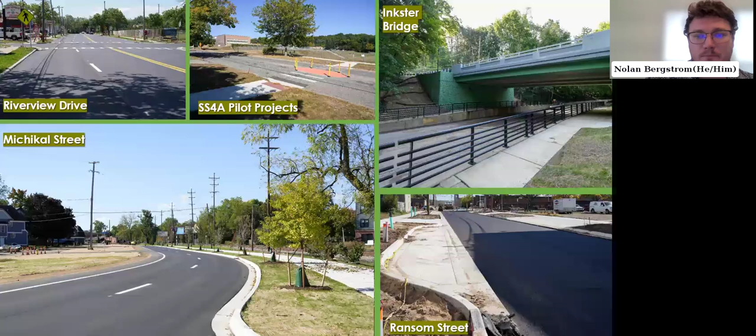And then, of course, Westnedge Avenue, which has been kind of the big one this year alongside White's Road, just kind of giving the scope of how much infrastructure was changed on those roads.

When we're talking about water main replacement, it's a really long process, but the benefit is that we hopefully won't have to dig those roads back up again in the near future at all. So this has really been a huge step forward in terms of the history of deferred maintenance with these types of projects, and just really needing to upgrade our underground utilities. It's a long process, takes a lot of time and energy and resources, but it's a net positive.

And then we've also installed some traffic calming tools as well as adding some non-motorized facilities in the city. Lovell Street's a good example. That's wrapped up in our Safe Streets for All program, but it's also called out in the Vine neighborhood plan, and there was some good support from residents along Lovell Street, especially on the west end, as you get closer to Oakland Drive and Stadium.

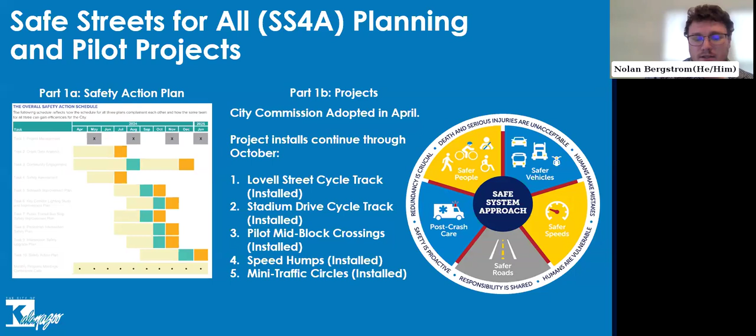And to help us get this safety action plan, I'm going to hand it off to our lovely consultants from AECOM and Alta, to introduce themselves and walk us through what that safety action plan is going to look like.

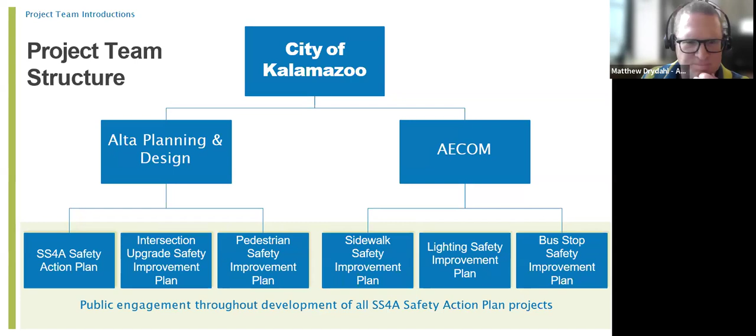So on the next slide, why a safety action plan? Nolan talked about it a bit. Safety has been a top priority at the federal level for a number of years now, and a significant amount of funding has been earmarked to address safety. An action plan like the one we're pursuing here is often required to obtain infrastructure grants, and that's really important. But this process will also help the city of Kalamazoo tackle safety issues in a comprehensive and strategic way.

On the next slide are some Michigan statistics. The point here is, so many crashes, right - 287,953 reported crashes, this is I believe in 2023. 1,021 were fatal. Bicyclist death toll was 24, pedestrian 183. So a lot of crashes that we want to prevent.

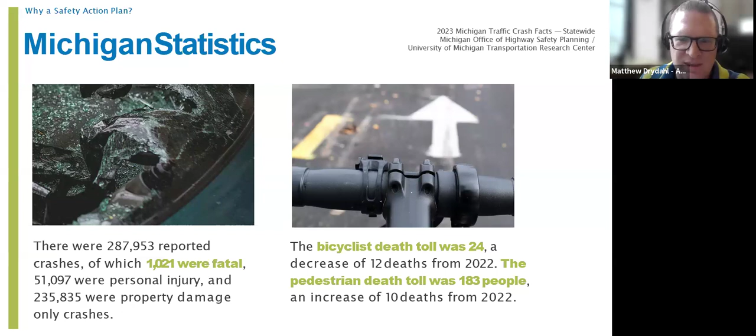Moving into Kalamazoo statistics, we'll just highlight here: 23 people killed, 3 of them walking. The idea with these Safe Streets for All efforts is that 0 deaths are acceptable on our streets, and we want to work to prevent them in the future.

So on the next slide, why is this happening? That's partly what we're going to figure out. This process will include significant analysis of crash data and others - that's essentially what we're here to figure out. But we generally know that speed is a major factor in crashes, especially crashes that lead to serious injuries. We also know that we often overbuild streets, across the country, in order to move cars efficiently. Again, that's what we're exploring here, and finding ways to address it.

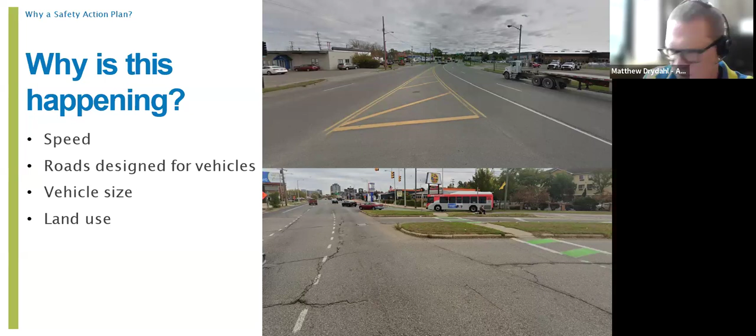So now we'll move into the project overview. On this slide here, we'll take a moment to give a brief overview of each of the 5 components to give you a sense of what we'll be exploring in the overall safety action plan.

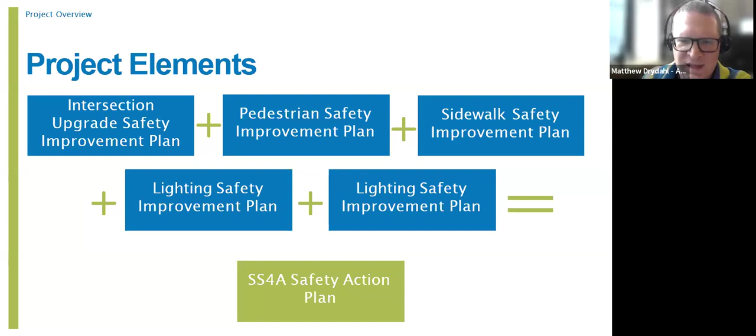On the next slide, there are 2 types that Alta is going to be tackling. The first one is focused on intersections and all modes, so people walking, biking, and driving, and crashes that are happening. We're going to take a look at the top 200 intersections for crashes, try to get an understanding of what's happening, and pair specific countermeasures or improvements to what's happening. So that is the first plan.

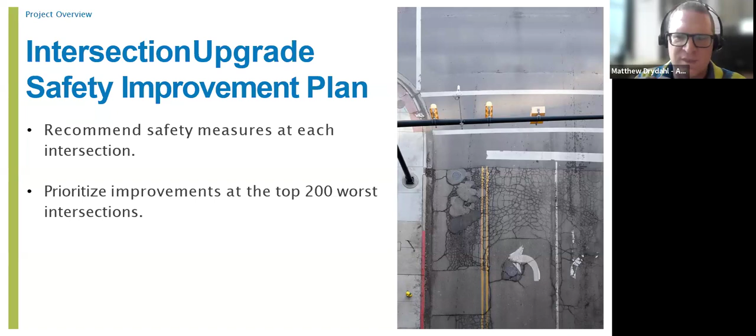And then the second one, we'll be digging in again on pedestrian safety. Part of this plan will include a pedestrian level of traffic stress, which will basically be analyzing all of the streets in the city and identify where it feels really safe and comfortable to walk and where it may not feel safe and comfortable to walk. And we'll do that by looking at a lot of data: number of travel lanes, speed limits, presence of sidewalks, things like that.

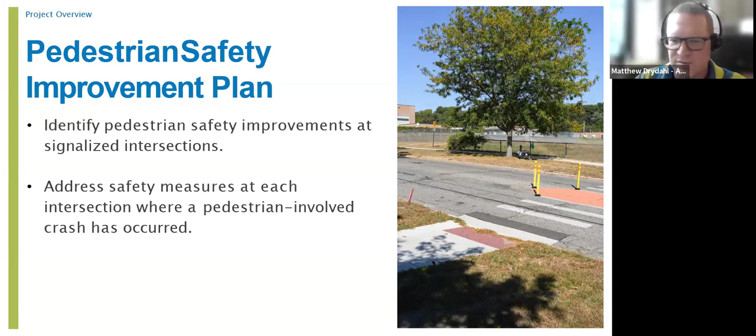And now I've been talking a lot. I will turn it over to Pam to talk about AECOM's plans.

All right, thanks Matthew. Yeah, so our first plan, we're doing 3 separate plans and analyses. Our first one is the sidewalk safety improvement plan. This kind of works in conjunction with that pedestrian safety that Alta is working on. But we're identifying where are those safe sidewalk gaps out there in the network, and looking at them in relationship to crashes as well, where are pedestrian and bicycle crashes, especially on those corridors.

If there's not separate dedicated bike facilities, we know that most of those bicyclists are out on the sidewalks at that point. So where are some of those gaps? How does it relate to the crashes? But then also, how does it relate to some of the major destinations where people are trying to get to? So neighborhood parks, things like that, the downtown areas. So we're just trying to help kind of build that network so the city can prioritize where to fill those gaps in first with some of that unprecedented funding that Matthew was talking about.

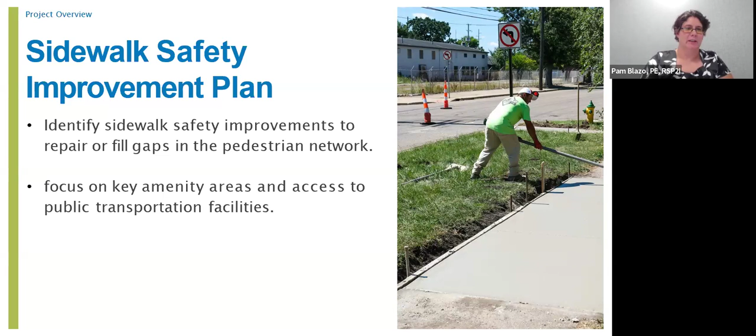And then on the next slide, our second plan that we will be looking at, AECOM is a lighting study improvement. So we do have some data we've received already at this point from Consumers Energy, but looking at what is the existing lighting out there on the roadways, both from a street level lighting, but also pedestrian scale lighting. So some of those not as tall, like those lower level lighting fixtures that are designed to light the sidewalk, to light those pedestrian crossing locations.

So looking at it from that standpoint, also comparing that to the crashes that have happened that are happening under dark conditions, both dark unlit, where there is no existing lighting, but also dark lighted conditions as well, and looking at the type of lighting on those corridors to see if there's any recommended improvements that the city can work with the different utilities for.

And then our third plan that we're working on is a transit bus stop improvement plan. So with this, we're looking at a number of factors with the existing transit stops that are out there and trying to help prioritize where to increase amenities and or make any changes to the stops themselves or the access to get to those stops. So this goes back and ties in both the sidewalk access to these facilities, lighting, are there existing amenities or amenities that are needed at some of these high priority locations in terms of benches, shelters, things along those lines.

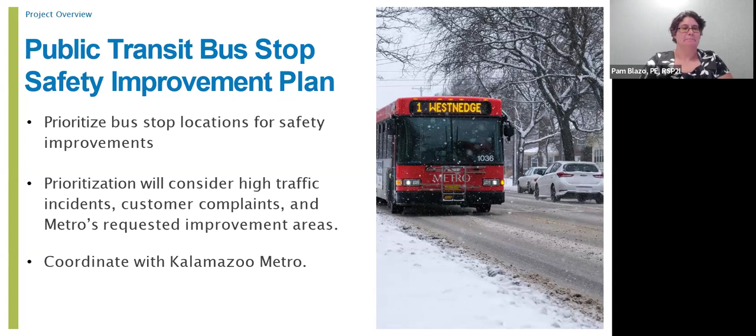Our approach overall to the project: we're starting now with an effort to hear from residents, and some other engagement activities. Then we'll get into the complicated analysis we've been talking about, understanding what's going on with crashes. From there, we want to identify solutions specifically connected to what we learn, both in the engagement phase and the safety analysis. Finally, we'll identify specific projects that can be implemented in different timeframes, as well as assist in finding opportunities to fund the projects.

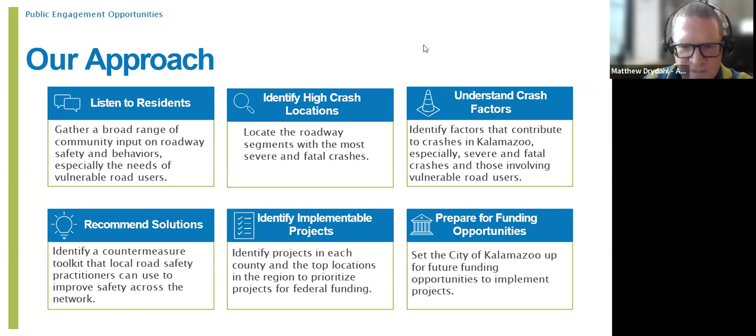A little bit on the timeline. Again, kicking off the project now, with lots of engagement and analysis work happening over the winter. In the spring, we're looking forward to a public webinar to share what we've found so far and some recommendations. Then we'll move into a draft of the plans and wrap up in the fall.

So engagement at a high level: we have a safety task force helping guide the project. We've talked about the online survey and input map a few times. There will be stakeholder meetings, public meetings, pop-up events, and the project webpage and social media efforts. So a lot of different ways to connect on this project.